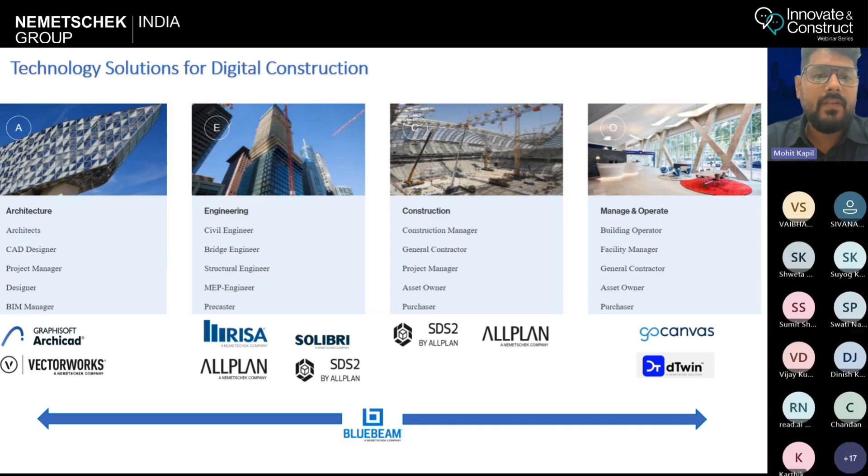So now I'll jump on to today's topic, that is SDS2. Today we are going to explore the latest release, that is SDS2 Indian region. SDS2 is a leading steel detailing software, with fabrication intelligence and automated connection design. It is a very old company: SDS2 was founded in 1981 and has been in the market for 43 years. SDS2 merged with Allplan, basically the Nemetschek group, in 2022.

So these are all the steel buildings where SDS2 can be used. Commercial, industrial, platforms, pipe racks, rails, custom homes, mixed use, oil and gas, anything. If you talk about steel, SDS2 can be used for steel detailing.

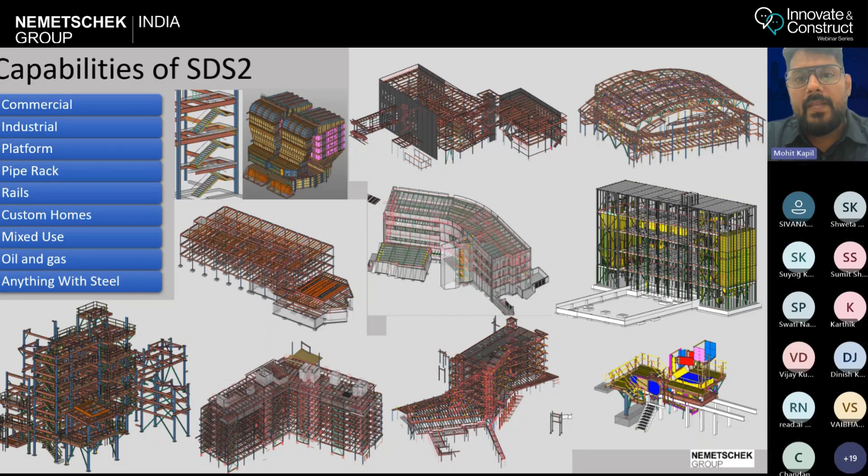Now, moving further, I just want to place a quick poll. So Shweta, can you? Yes, Mohit. So is the first poll visible on your screens? Yes. Okay, we are getting responses. So the first poll is: are you working on Indian projects, with Indian profiles? You just have to say yes or no. 82% have said no to this question, Mohit. Okay, so we can move forward.

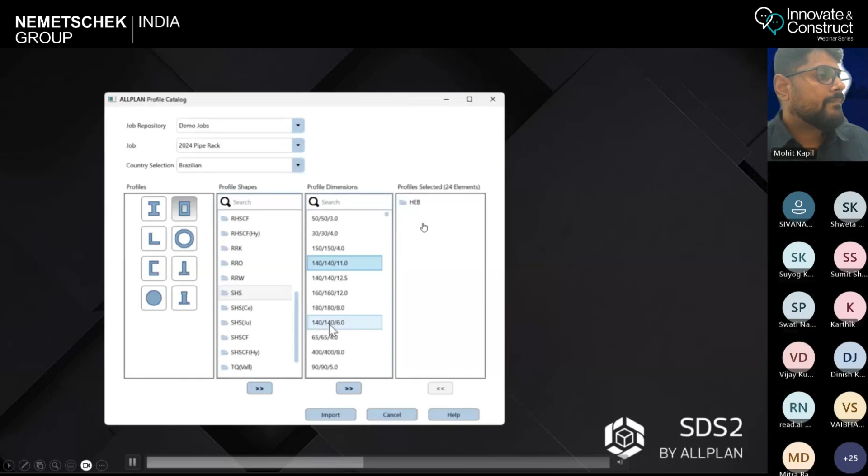So now we are selecting the individual profiles. If the profiles are already imported, they will not be copied twice. So there is no duplication.

So as you go into shapes and properties, here you can find all the imported profiles. So you can see these are Brazilian profiles which are imported into the sample model. So now it will be visible and can be used in the project.

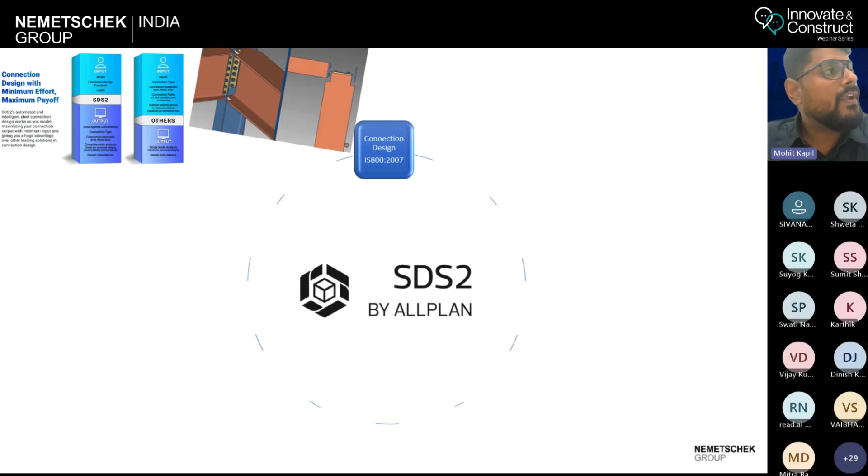So now I'll first give an introduction about SDS. What are the capabilities of SDS? So the first key feature of SDS is SDS has connection design, and for the Indian region, we have IS 800 code. Then SDS2 has fabrication intelligence. SDS has automated piece marking. We are going to cover all these topics in coming slides.

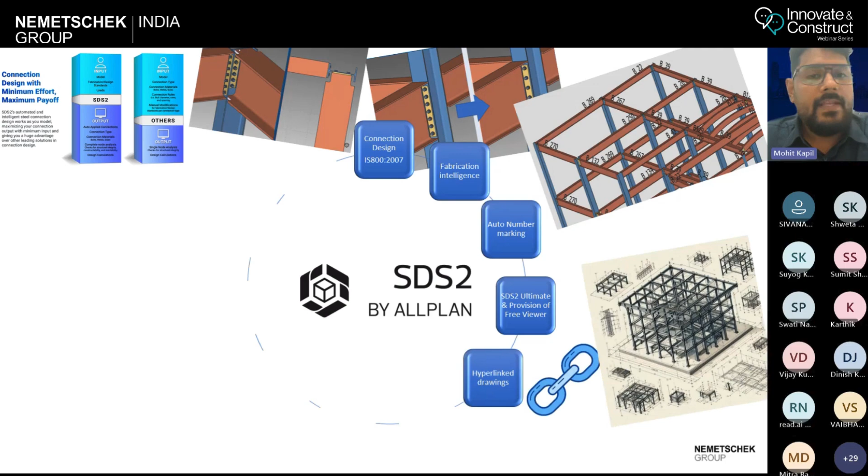Then SDS for India, we have only one unit, that is Ultimate, and we have a provision of a free viewer. Then SDS provides hyperlink drawings. SDS has better quality of export than other detailing softwares. In SDS, you have a status display feature, which is basically a filtration option.

Then integration and partnership, you can see SDS has integration with most of the market popular softwares. Then SDS has a feature of live user modeling. SDS has the option of direct plugins for doing complex geometries and adding miscellaneous steel. And SDS also has a cloud collaboration platform, which is called BIM Plus. So now we'll go one by one.

So the first feature was connection design. So whenever SDS is designing any connection, SDS considers all these parameters before designing a connection. So SDS considers the connection is supposed to be constructible. It's supposed to be erectable. The user has complete control. He can apply all the connections in one single go through auto standard connections.

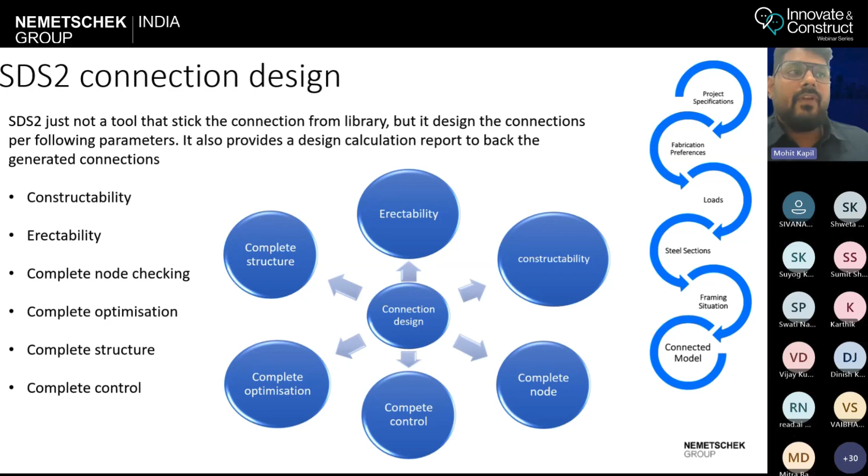And if the connection is applied through SDS, the user has full control. He can change and modify the connection if and when required. All the connections are also backed up with a calculation report. So before generating any connection, SDS considers the project specification, fabrication preferences, loads, steel sections of that region, then the framing situation, and then it generates the connection.

So these are the scenarios I just want to discuss with you. You can see this one is for SDS and the other is for the other market detailing softwares which are available. So in SDS, you can see the user input is very less. You have to give very few inputs. You give the main basic framing of the model, then you give the standard of fabrication and loads, and SDS gives you auto applied connections, connection types, bolt material, also with the design calculation.

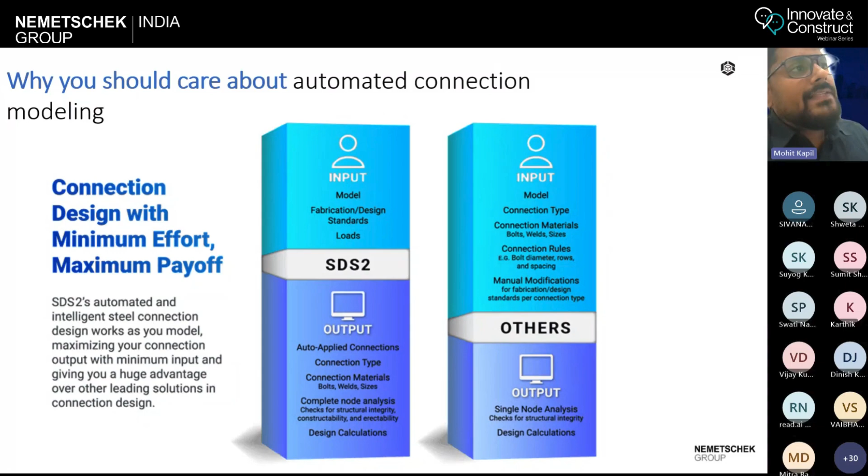So if you see, since the user input is very less, there are very few chances of having human error. And also the project timeline gets shortened. While if you use any other detailing software, you can see the time consumed is more. And since the user input is more, there are more chances of having human error.

So through this diagram, you can understand why a designing component is required in a detailing software. Nowadays, whenever a job lands with a detailer, he is also given the responsibility for doing the connection design, or he has to coordinate with the connection designer. So if you have a connection design engine in your software itself, you can easily design a connection.

You can send the calcs to your designer, and the to and fro communication between the designer and the fabricator will get squeezed out. So basically the non-profitable time, which is not giving you any income, will get shortened. And it is a very beneficial tool for a detailer.

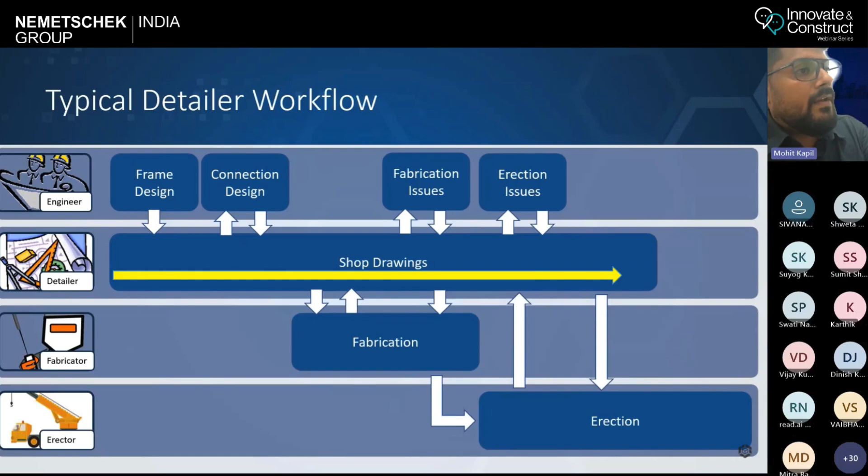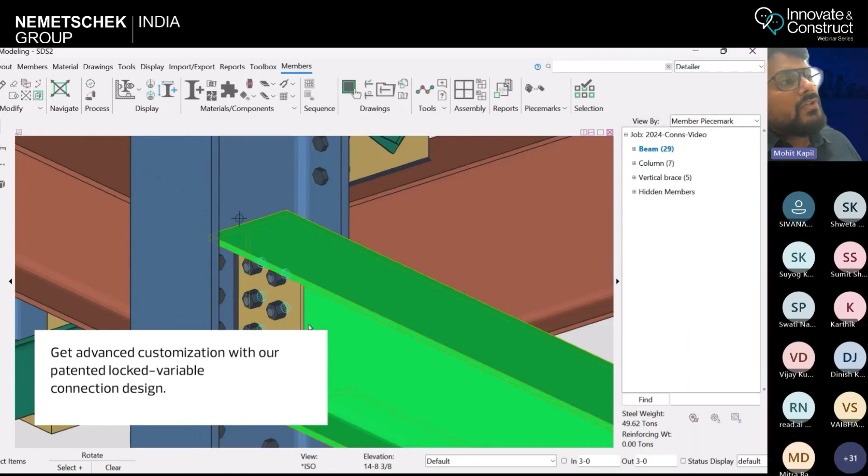You can also optimize the connection if you want. So here the clip angle connection is changed to a shear tab connection. You can also change the number of bolt rows if required. You can also change the load, and based on that the connection will automatically get changed. So in short, SDS2 does not just pick the connection from a connection library, but it actually evaluates the framing situation and generates the connection for you.

So the next feature of SDS2 is constructability and erectability. Whenever SDS2 is generating any connection, it also checks the material availability of the area, then the space validation for bolting, then any clashing during installation. It also checks any possible field and shop errors, the galvanization tank size, connection compatibility, and other various factors which can cause a field or a shop issue.

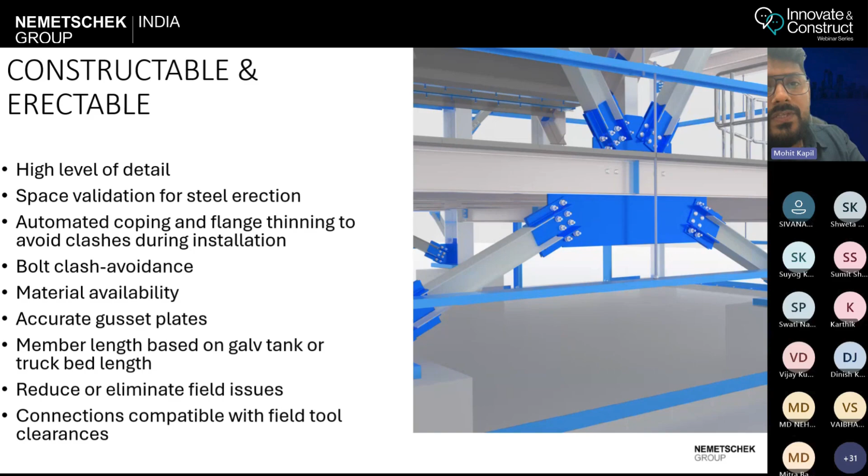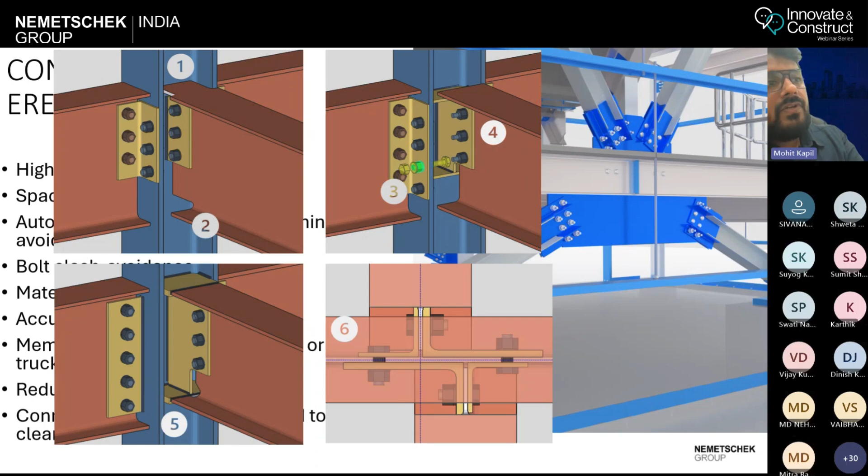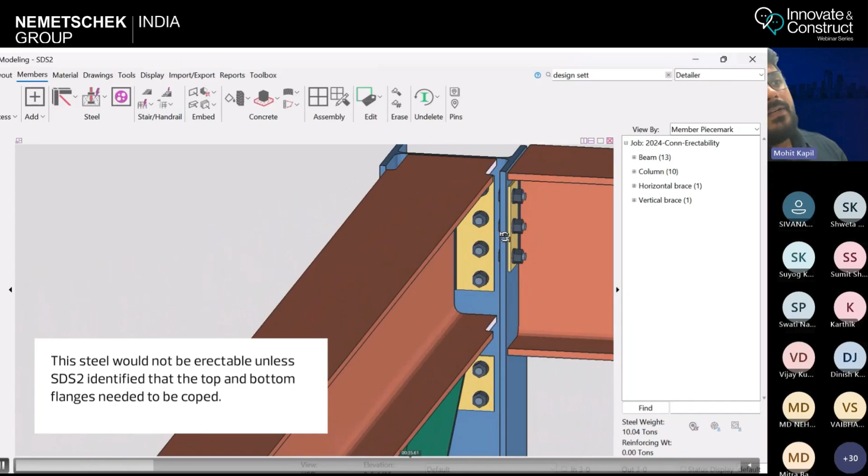So this is just a video to showcase how the constructible and erectable connection works. You can see as the connection is added, the brace is auto adjusted at the bottom of the beam flange, and cuts are provided at the top and bottom flange of the beam for bolt clearance and ease of drop-down connection.

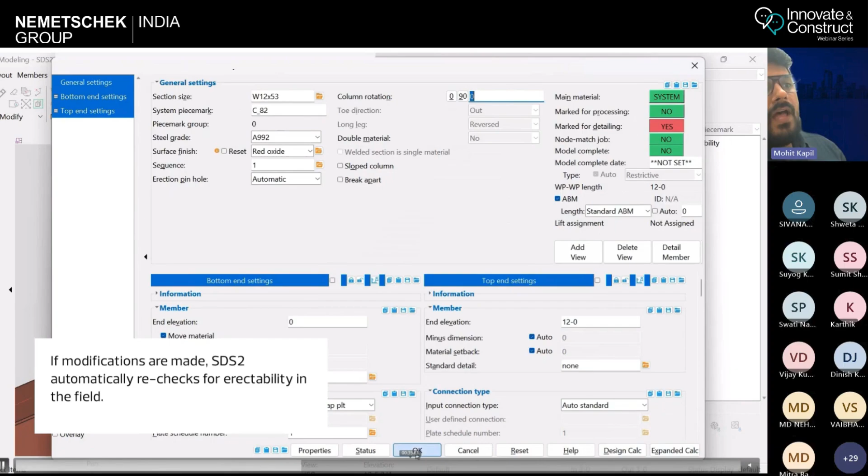Then as you rotate the column, the cuts are transferred to the adjacent beam for erection feasibility. And this is all system generated. There is no user involvement. SDS2 has fabrication intelligence in itself, which can analyze the erection feasibility at site, and also can check the constructible connection.

So here you can see the shear tabs are added. SDS2 has automatically generated and modified the connection to an extended tab since TC bolts are there, and a special gun is required for installation.

Then the next thing is complete node modeling. So what does this mean? It means if you're doing any connection or modifying any connection on one face of the column, SDS2 will automatically analyze and modify the connections which are coming on the other faces of the column.

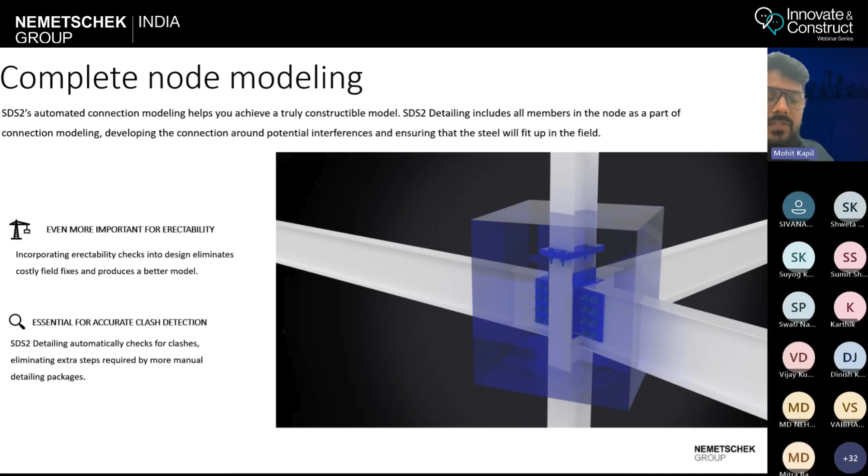For example, if you are modifying a shear tab connection to a moment connection and stiffeners are added in the column web, SDS2 will automatically analyze and modify the connections which are coming into the web. Then complete optimization is, whenever a connection is generated through SDS2, the user can modify the connection as required.

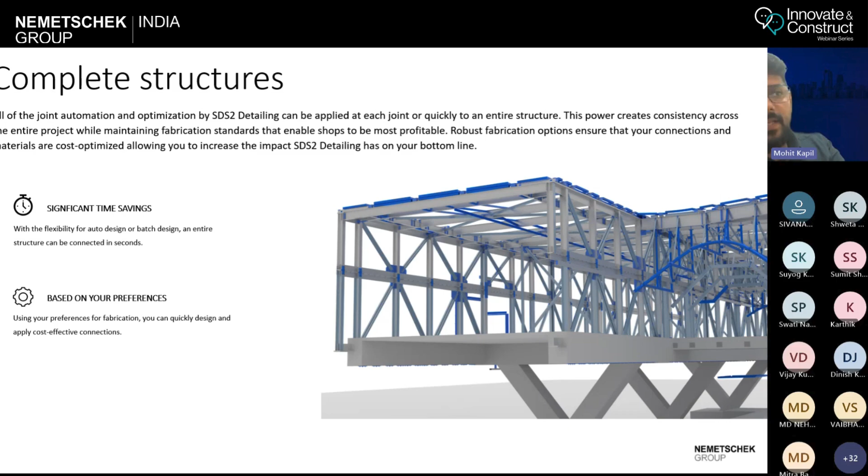Complete structure is, if you have a typical connection or you feed the auto standard connection into the system, you can apply the connection to the entire structure in one single go, and it saves a lot of time. The next best feature we have in SDS is connection cube.

Currently, if detailers have to send any connection query to a designer or an engineer, they take a PDF snap, put all the dimensions manually, and then send it to the reviewer. It takes a lot of time, and at times it is very confusing for the reviewer, who is not able to understand what exactly the question is.

So for that, SDS has a very good option called connection cube, where you can select the connection and generate a report. I have a small video explaining how the connection design report is generated. You can see this is a connection. You can directly add a connection cube option.

You have a connection cube add where you can select the connection which you want to send to the reviewer, and you can add a cube here. Once the cube is added, you can include what drawings, what reports, what bolt criteria you want to include, and you can generate a report based on all the parameters. And when you double click, the report is generated.

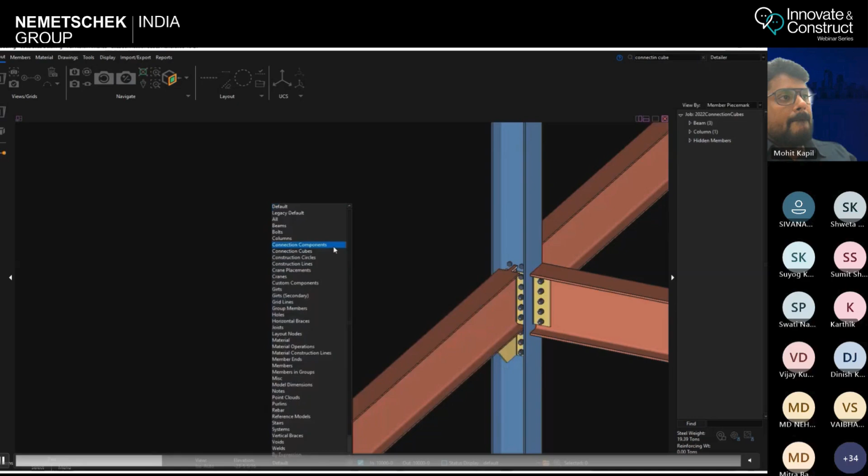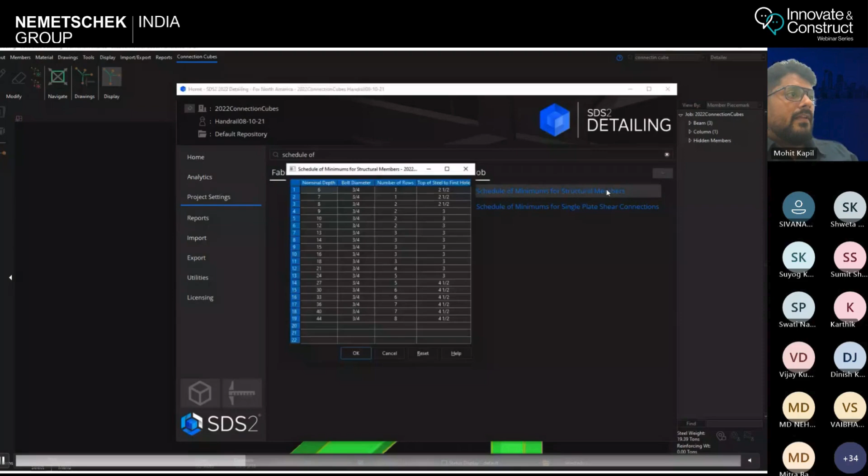This is another option which is added in the 2022 version, where you have to turn this on from the display command. You can provide a name to that report, or you can also tag it with the beam number. You can also include the schedule of members.

Sorry. So I'll just show you the report. I think there is an issue with the video.

So the next option which SDS provides is auto piece marking. So what is auto piece marking? If you take any other detailing software, at the time of modeling, the piece marking is not allocated. After modeling, you have to go to a complete version and then add the piece marking. But in SDS, as you add a member, a system generated piece mark is assigned to that particular beam or column.

If the members are identical, they get clubbed and one single piece mark is given. So if you are adding 10 identical beams, and later adding any material operation, SDS will prompt and ask whether you want the similar change in other beams. That is the best feature where you can do any material operation in one single go across multiple members. The second best feature of auto piece marking is that you can track the members.

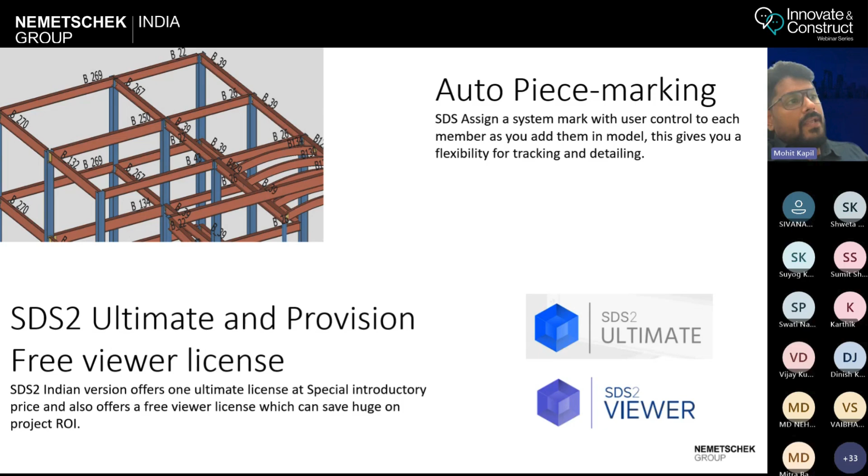SDS also provides a free viewer. If you talk about any competitor software, they do not have a drafting version and they do not have a free viewer license. But SDS gives you the ultimate version for the Indian profile, and also provides a free viewer license.

Since SDS has a connection design engine, you feed a lot of data before starting the project, or you can import it from an old project or a seed file. So when you generate the drawings, a lot of information is already there, like welds, member profile, bill of material, field bolt list. If you want to add connection reaction reports or design loads, that can also be added. Elevations and material setbacks are added. If a clip angle or any connection is there, the material information is added, along with hole dimensions, hole placements, and RD marks. Basically the drawings come out almost 60 to 70% detailed, because in SDS you have set detailing templates.

All the drawings which come out of SDS are also hyperlinked with each other. So if you are extracting all the drawings, and you have an erection plan, if you click any piece mark, it will automatically take you to that shop, gather, or part drawing. This saves your time going back and forth.

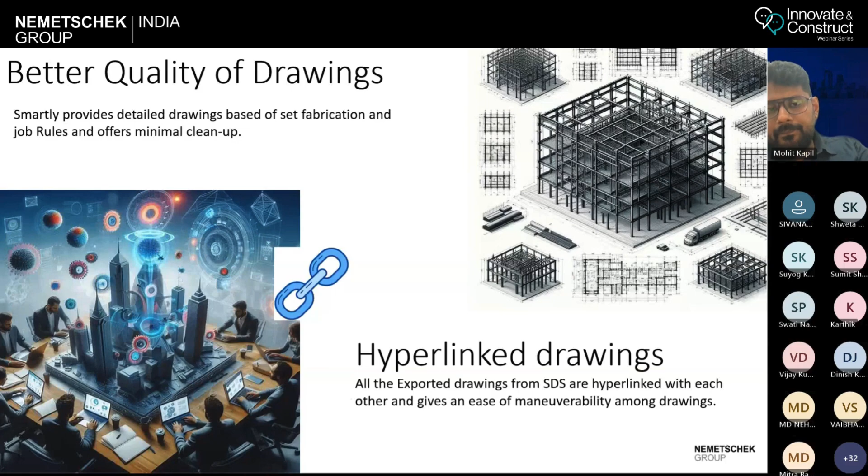SDS also has direct components for adding complex geometries like stairs, handrails, ladders, miscellaneous assemblies, four stops, girts and purlins, clevis and turnbuckles. I'll play a video to showcase how easy it is to add a stair and handrail in SDS.

You can directly import a drawing into SDS, and then through the quick stair adding command, you can directly add a stair. You just have to select the nosing point and the entire stair tower gets erected.

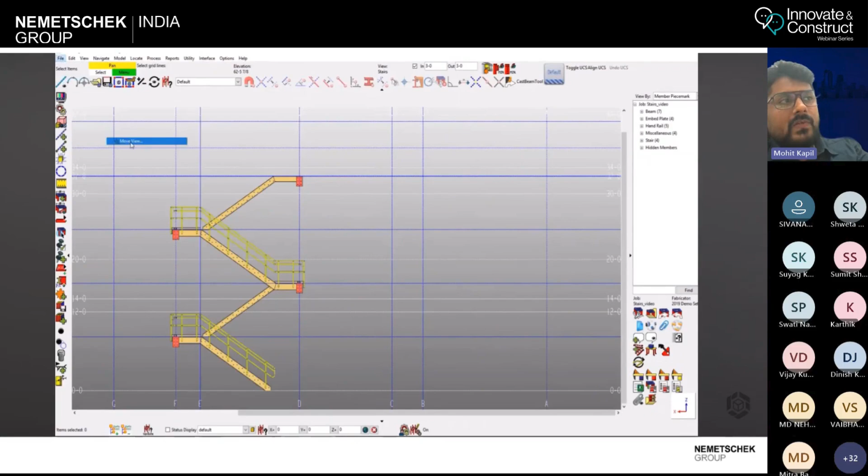For adding a handrail, there is a direct command for quick handrail. It will give you a skeleton, and then you can change the post spacing, the stair type, the tread type, the railing profile, the turn and the return, and whether the ends should be a post, a splice, or just a post end. There are a lot of features you can control.

So basically, these commands give you the feasibility to add these kinds of miscellaneous assemblies in one single go.

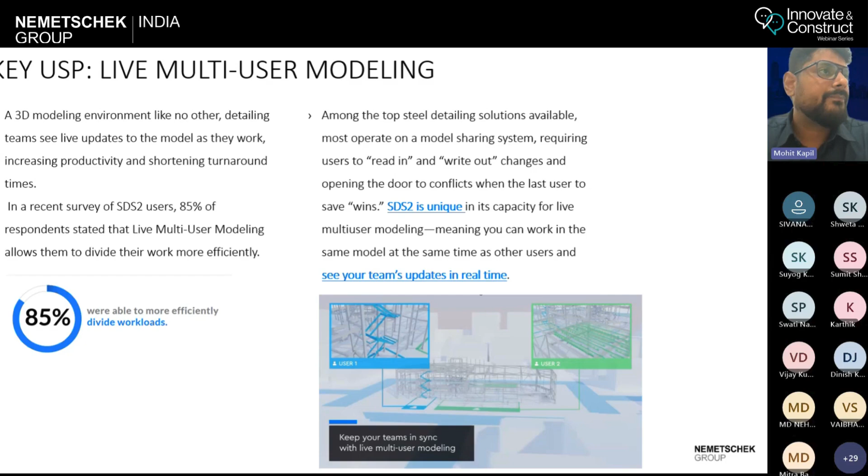Then there is a very good feature of SDS2, the status display feature, where you can filter the entire structure and model on parameters like existing steel or project status, whether it is completed, issued for approval, or issued for fabrication. You can also filter based on member profile, member type, or material, and based on connection status—whether connections are failed or not—type of bolts, type of weld, sequencing, or zone.

There are a lot of parameters based on which you can filter the entire model. This helps, for example, if you are running a big project and in the middle of it you find out that a particular profile size is not available and you have to change it. With this filtration option, you can isolate those particular steel profiles from the entire project without failing.

This is a very good feature for reviewers and checkers who want to filter the entire steel, and also for modelers. If the modeler can place a project status into the main model, the checker can easily isolate and allocate work to detailers using this feature.

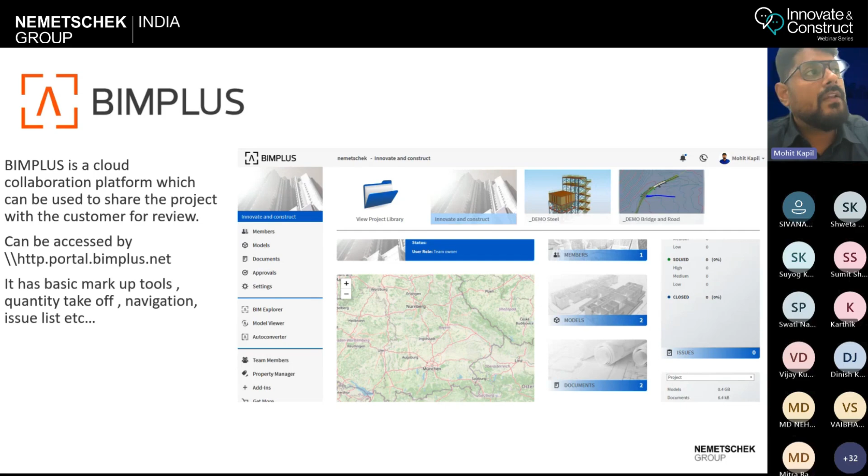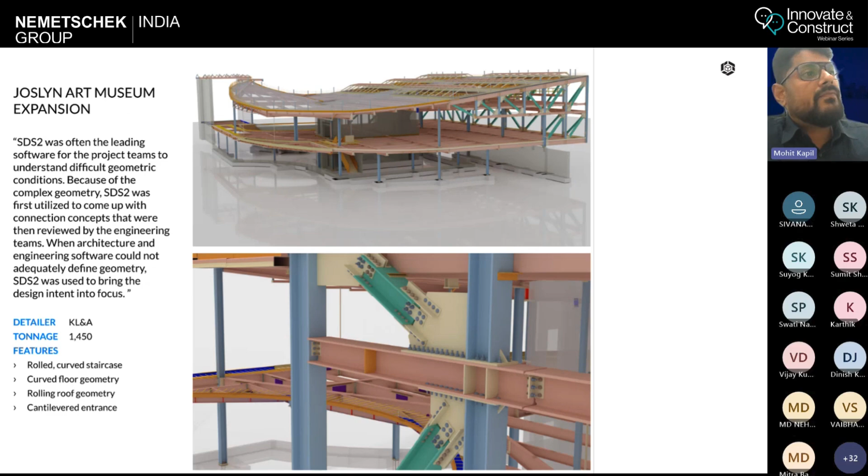Now I will showcase a few projects done in SDS2. This is the Joslyn Art Museum expansion. It is a non-linear building with very complex brace connections, which you can see in the image, and this is the final erection image of the building.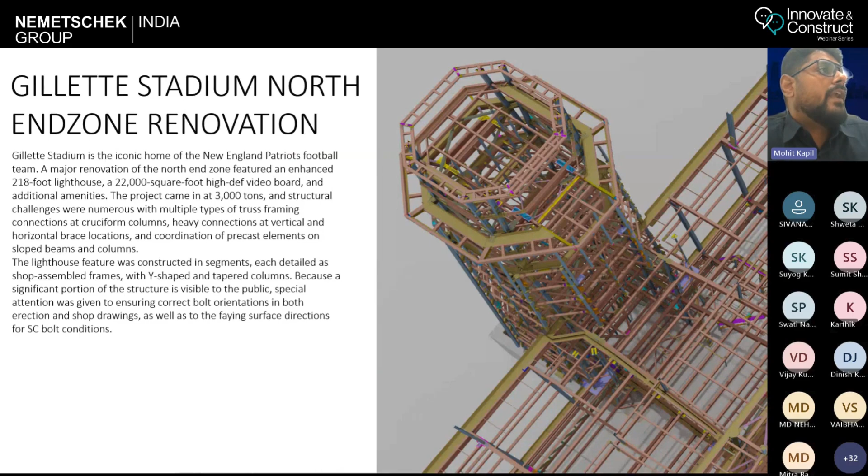Then there is the Gillette Stadium North End Zone renovation. In this building you can see the model image versus the live site images. Notice the green colored Y-shaped columns, which were very critical to execute, done in SDS2.

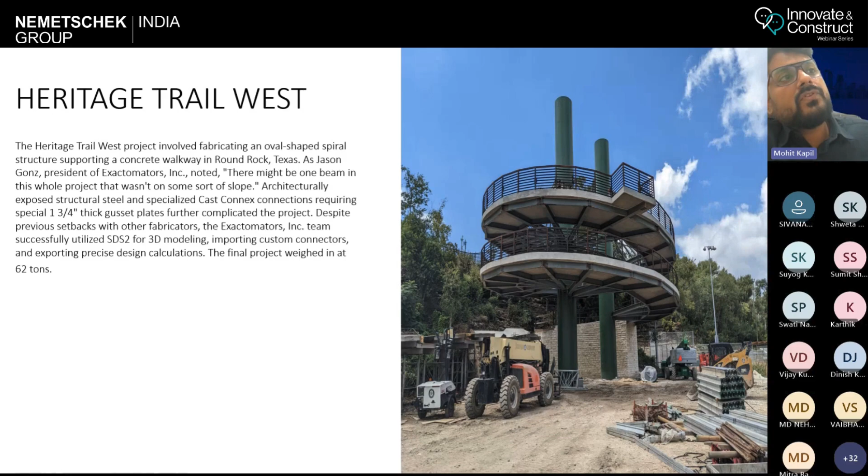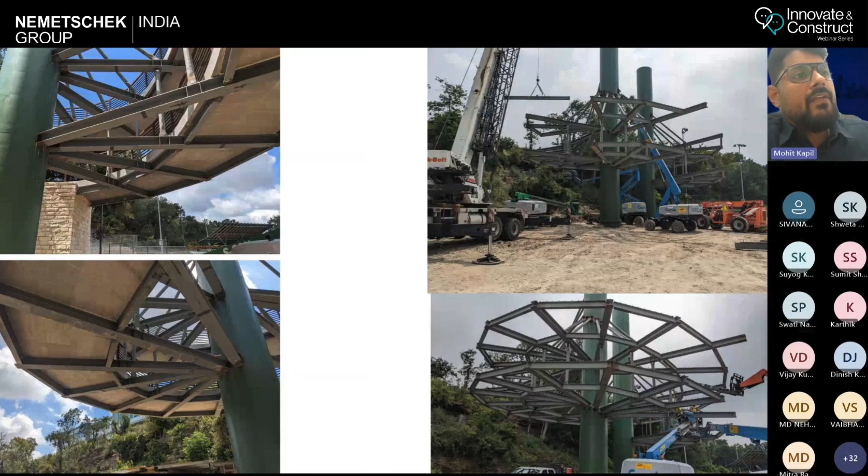Then there is another project called Heritage Trail West. In this project you can see two pillars - the entire circular platform was connected and hung from these two pillars using rod braces. These are the drawings, these are the model images of the project, and these are the live on-site images.

This is the last building I want to show you, the Deloitte Summit Tower, Canada. There is a main concrete tower from which a box-type structure was connected, and these complex connections were executed in SDS2.

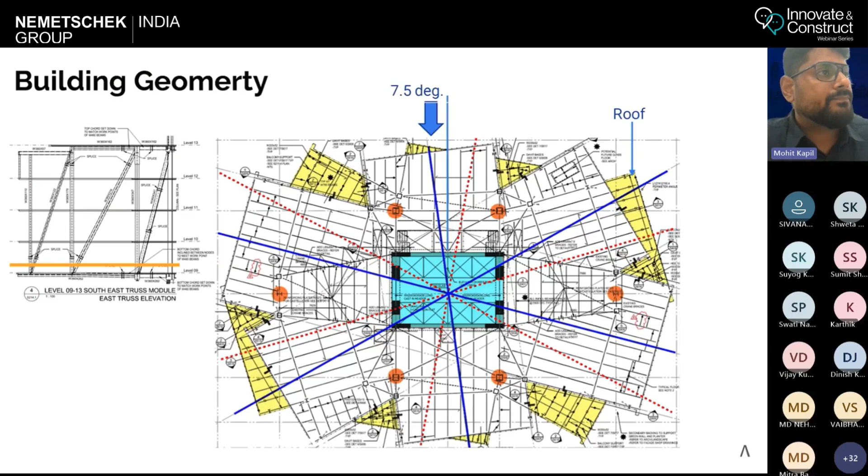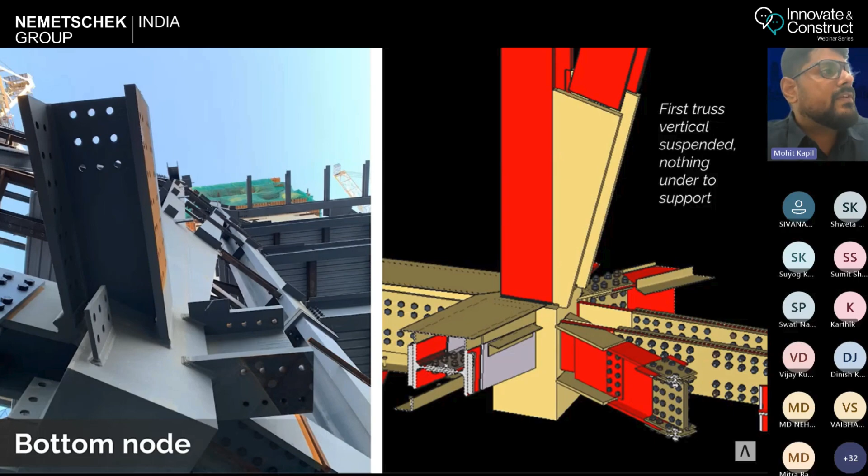This is the drawing plan view and this is the model image of this project. This is the modeled connection versus the on-site connection, and these are the images we have in the drawings for the connections.

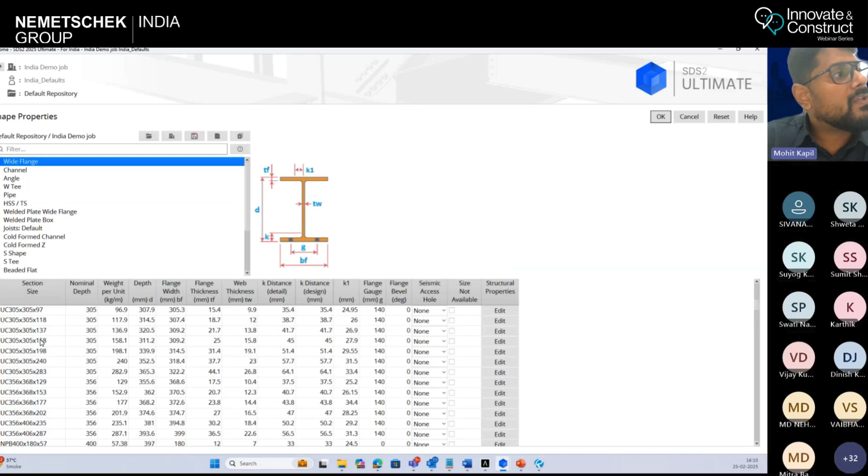The profiles which are imported, you can see in your shapes and properties. So all the Indian profiles are here - all channel profiles, ISMC, ISMJ, all angles ISA are there. For pipe also, you have ISCHS profiles available in the version. Also you have British profile sizes available, which are being used by Tata and Jindal Steel.

So I'll just open the SDS2 model. I have prepared a small model using ISMB and Indian profile sizes. I'll quickly go through and explain - this is the lightning mode.

This is the layout option where you have your different views which you want to open. Then you have your save area and save image, which is for your erection drawing. This is for adding any grid lines, any curved grid lines. This is for plan view. This is for taking any section view. This is for undo, and this is for depth check and navigation.

This is for snap to surface. This is for construction of a construction line. This is for erasing any construction line. This is for circular construction line.

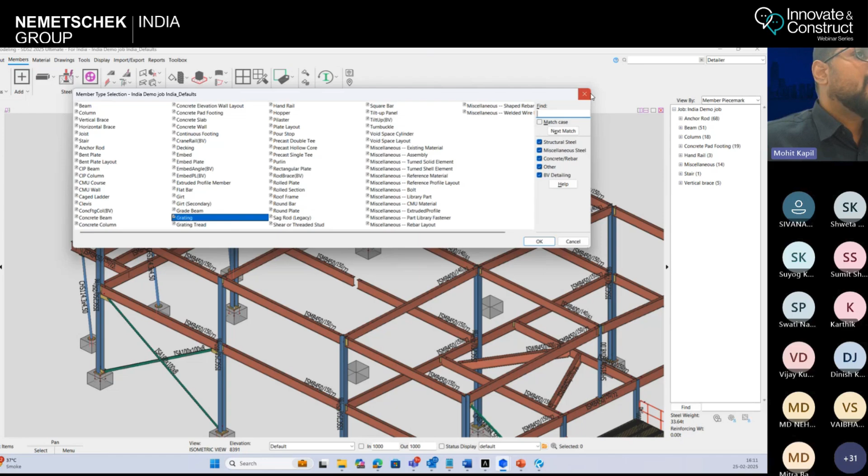Then you have the second option as member. If you go to member, you have all the options for adding any members, like what you have in your older classic mode. So currently I'm in lightning mode, and you have all the main members you can add from this profile. There are also a few quick tools for adding column, beam, vertical braces, horizontal braces, or joist.

You also have a plugin for adding anchor bolt, stair, cage ladder, railings, pour stops, girts, hoppers, and purlins. You also have the option for adding a quick stair and quick railing, adding embeds, adding any concrete members like footing and concrete slab. You can also add any wall systems, any rebar systems using this, and this is for the undelete option.

Then you have the material option where you can add any material - plates, flat bars, clevis turnbuckle, floor plates like grating and checkered plates and deck. Then you can add any component like cap plates and base plate shear keys. You can also add rebar systems, any safety lines, holes, any stiffener column reinforcement, pour stops, bolt holes, then studs and welds using these commands.

Then this is a drawing command. Since this is a complete version, you can directly sheet load and detail a drawing from here. So this is a drafting option where you have the erection placement option, then connection cubes, for detailing any member, for detailing any material, and sheet is for sheet loading, the auto sheet loading command.

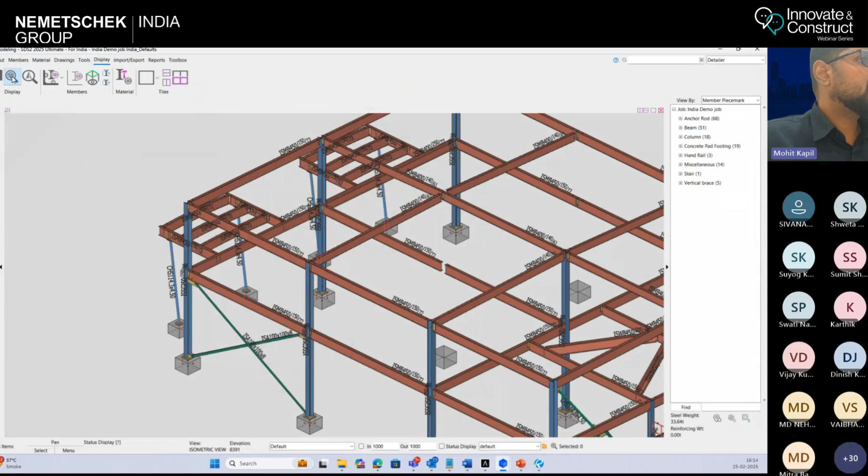I'll just show you the filtration option. For example, I'll put a beam as galvanized, and then put a filtration option here. Instead of this, I'll put a member status and I want the member to be galvanized. I can put a color if I want - I'll put a green color and press OK. So you can see all these three beams are galvanized out of my entire structure.

So this command is very useful if you want to isolate or filter any particular steel.

You can turn this command on directly using this option with one single click. You have an option for splitting the screen. So you also have the option here. If you want, you can split the screen and use both screens simultaneously. Okay.

Then you have your import options. So in SDS, you can directly import or export any model from this command. You can also find this command on your main screen. So you have the import, export, and report command, which is the same as what you have here: import, export, and report command.

And you also have your toolbox command, where in SDS, if you go to the main site, SDS2, you can go to support, go to SDS toolbox, and you can see a lot of toolbox options there which you can download. So the plan profile catalog is there. Similarly, you have BIM plus upload also.

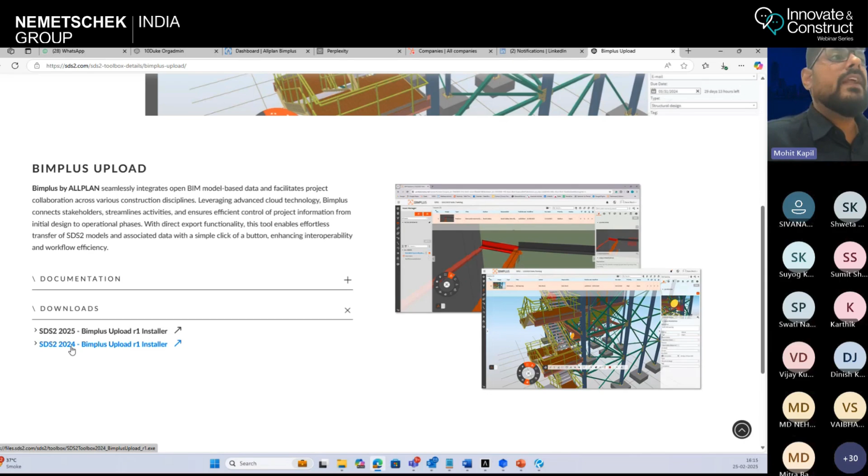So you just have to go to more options and then download the version you are working in. For this, the plugin is available for 2024 and 2025. So you can download this, and once you install it, it will get directly attached to your main SDS2 model in the toolbox command option. So I have imported almost all the commands.

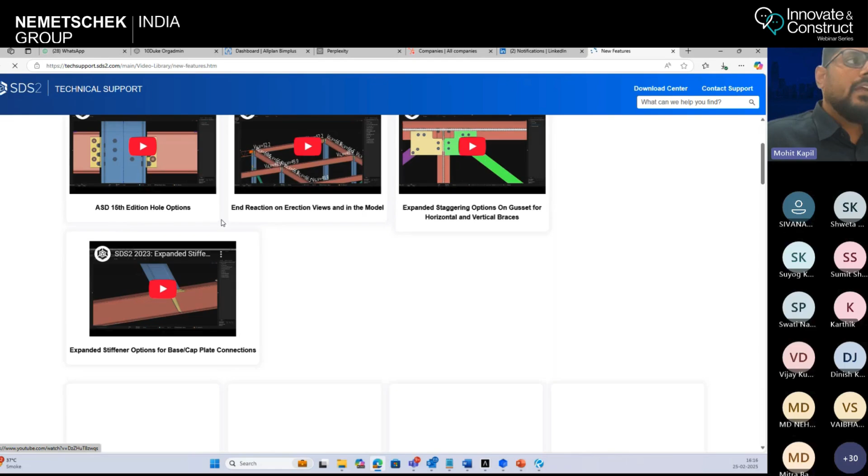Then one more thing I just want to show you. If you go to the home page, you have commands here, which is your learning command where you can learn the new features. There are small videos if you want to see. If you go to the new features, you have 2025, 2023 small one-minute videos which you can go through to learn what has been updated in the new versions.

So these are all the new commands from 2022. These are all the new commands from 2021 which were added. Similarly, you have them for older versions also. Then you have getting started videos. So if somebody is new and wants to learn SDS, he can review these videos. These are basic videos: how to draw a construction line, how to create a project. So all the basic things.

Then you have online training also. These are small trainings and you get a certification in the end. You have a support option, which is for contacting us. And this is a technical support option, which is an online help tool. So if you go here, you have your frequently asked questions.

Sorry, I think there is some issue with the site. I think currently the page is not visible. I'm sorry. So I think we can directly go on to the...

So from here also you can go to the technical support center. This is the basic site where you can go to getting started videos. You have online help, you have FAQs also. So FAQs, if you have any doubt regarding licensing, modeling, drafting, import, export, networking, how to install a new license, MRP exports, general template settings. So you have everything mentioned here.

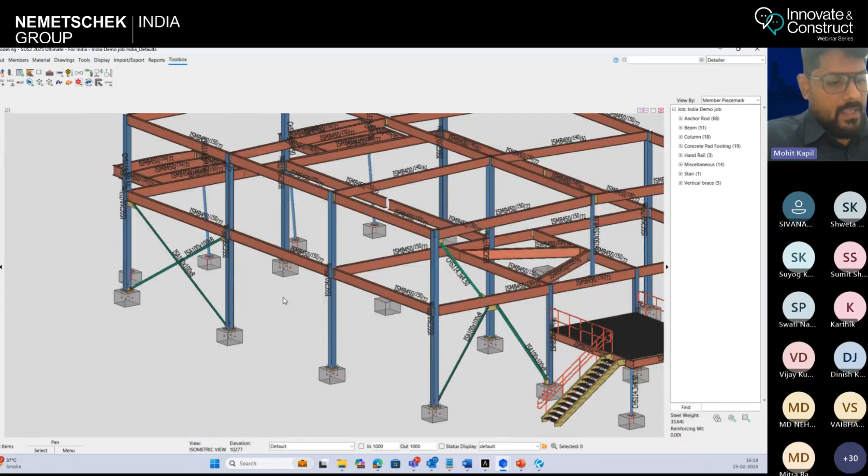So I'll open the SDS2 model. This is a small model that has already been created. So I'll just add a few members and show you how the SDS2 Indian version works. So we'll go to the navigation command, and we are on 0 elevation. Now we'll add a column. For adding a column, we have a direct tool, that is the add column tool.

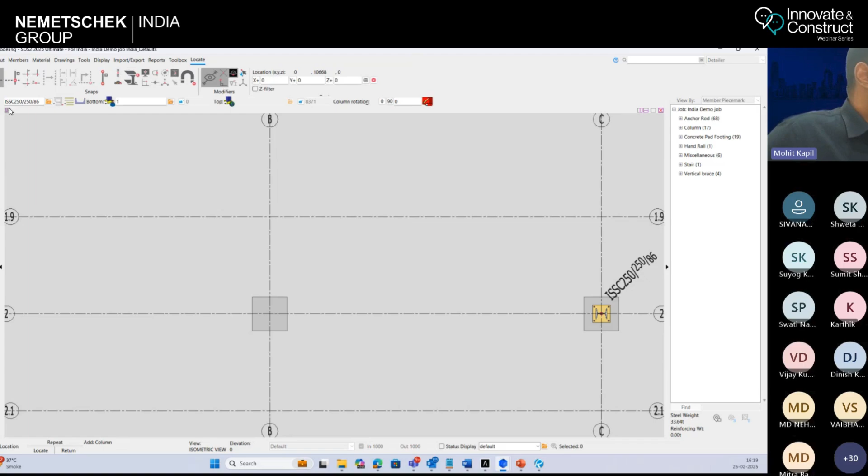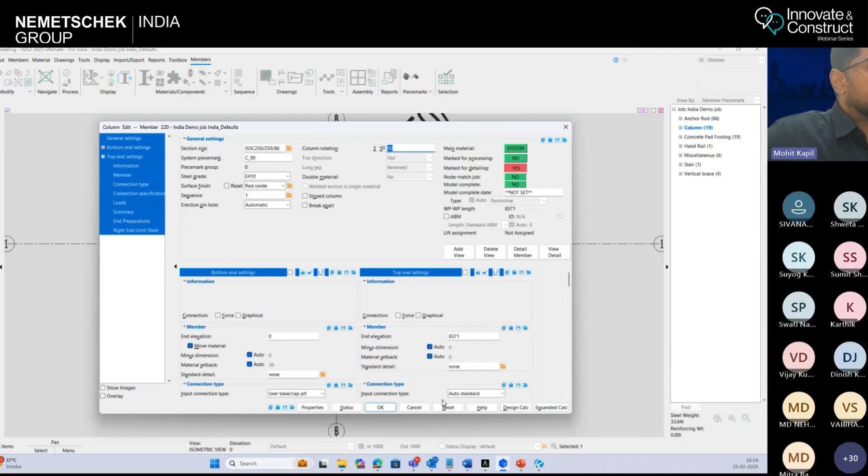So now if I have to add a column, the profile size is ISSC 250 by 250 by 86. So I'll directly add this. I choose a repeat command where I can directly add the second column. Sorry, I'll just process the members. This column is rotated by 90 degrees and the top elevation is correct. So now if I rotate the model, you can see all the connections are automatically generated for this.

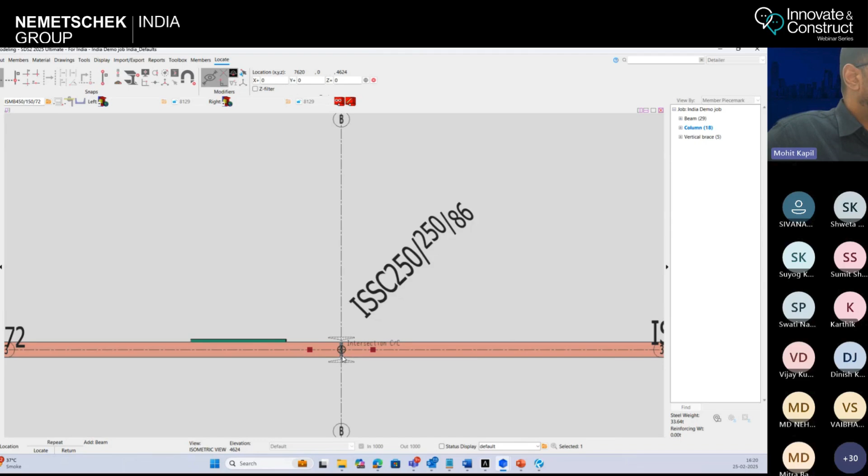Now we'll add a beam. So we'll go to another elevation, that is 4624 mm. So we are here. Now we'll add the beams. We have a direct command for adding a beam. We can go to beam. The beam profile is ISMB 450 by 150 by 72. So we quickly just, here to here, we'll add a beam. From here to here, we'll add a beam. So you can see the beams are added.

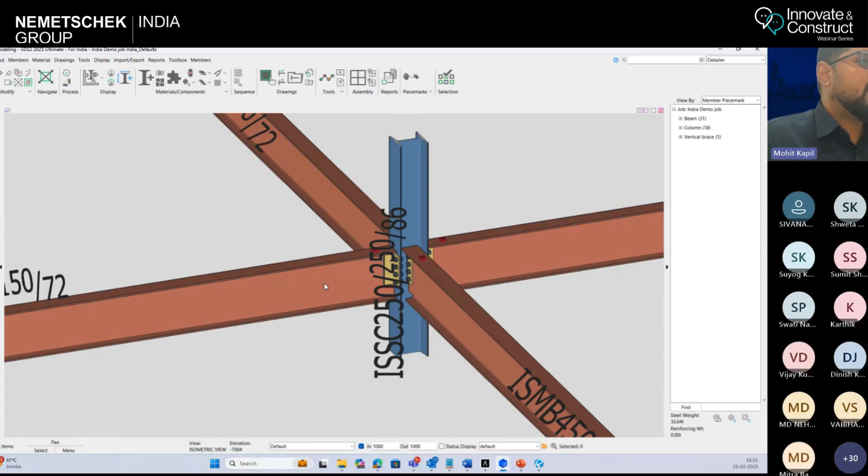Now, the best thing about SDS2 is if you want to change. Currently I have a clip angle connection at this side and I have a shear tab connection at this end. So when I double click, you can easily see. This is an auto standard connection. This is a web plate connection. And you can see the load for both the members are different.

So if I change, I can modify any connection. I can go and I can choose this also as an auto standard. You can see the loads are automatically changed. When I press OK, the connection is modified.

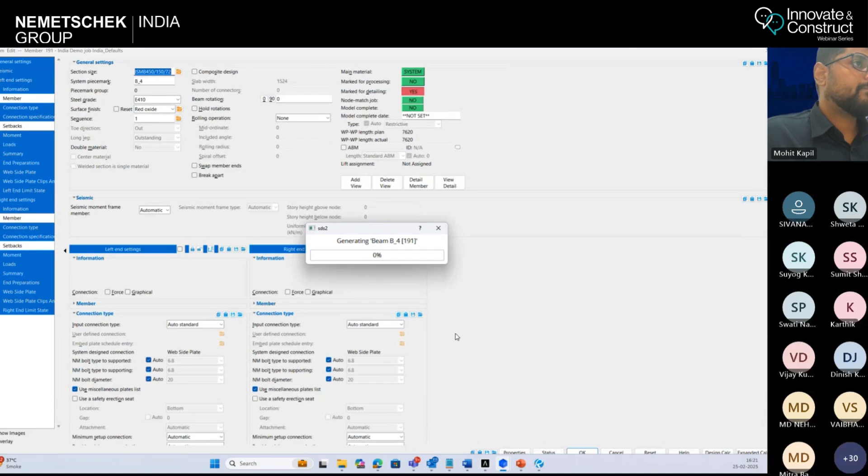I also want to show you one more thing. If you go onto the project settings and if you go to design settings, you have IS 800 codes. So whenever I generate a beam, if I double click this beam, I extract a report. So you can see this report is generated in IS 800 code.

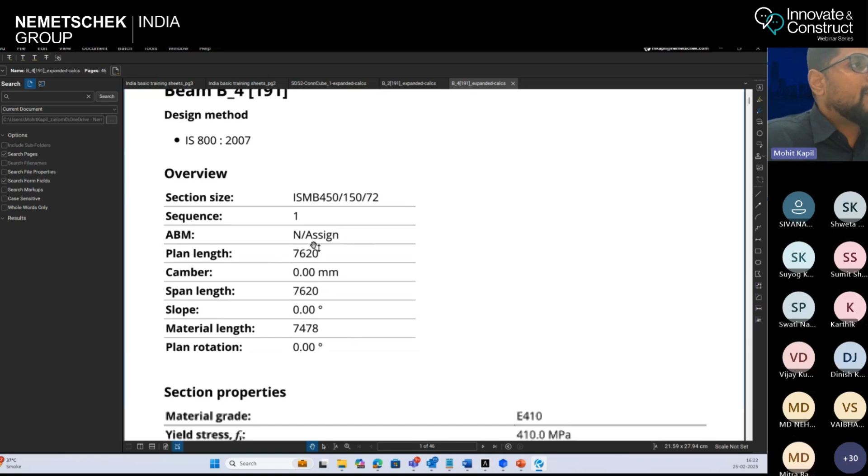You can see all the parameters like the section size, sequence, ABM, plan length, camber, and all the member related information like material grade, yield strength, tensile strength. All the parameters are being calculated. Also, there is one more thing I want to show you. If you go down in this calculation, you can see here.

All the parameters, for example, bolt bearing on beam web, it has considered a number 20 and it has also marked the IS code from where it has considered the reference table. So it has taken this number from IS 10.3.4 clause. So you can send this entire report to your designer and he can review this.

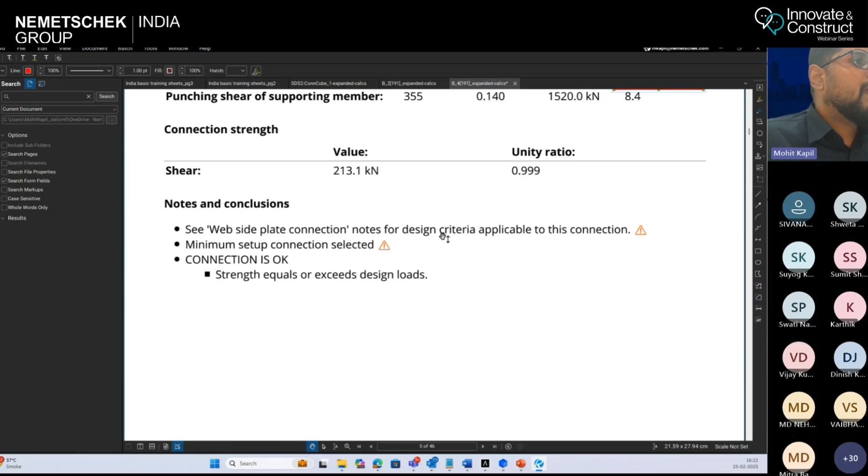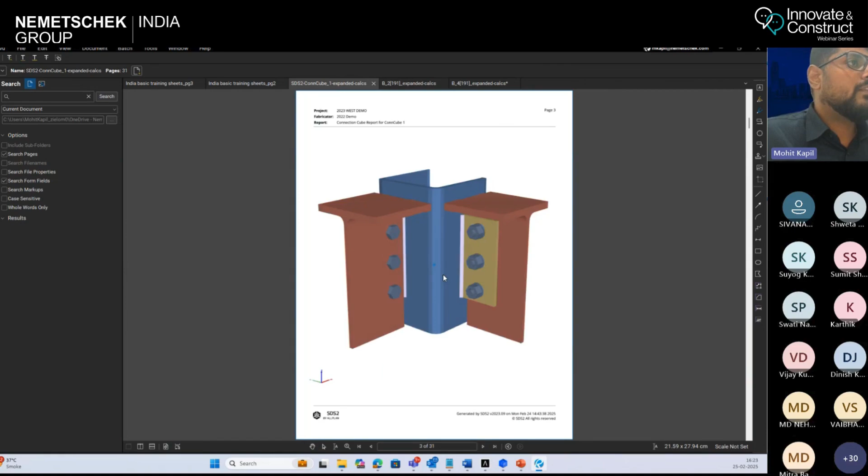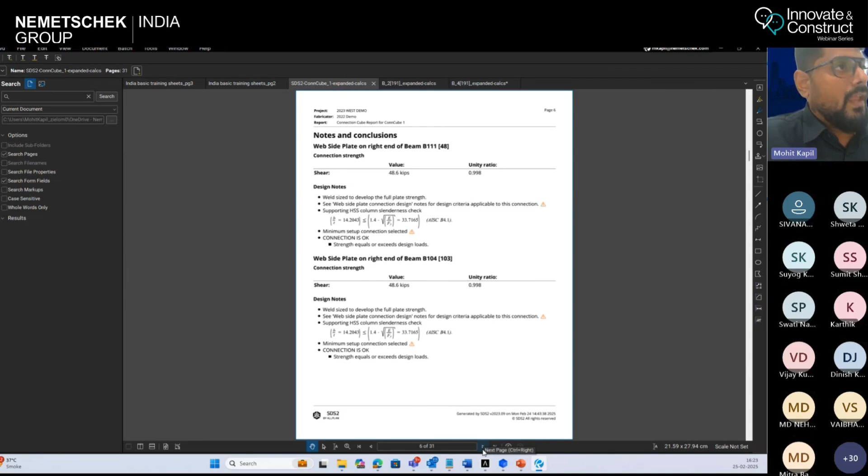So what is the bolt length? What is the material thickness? How SDS2 has calculated. SDS2 will give you the entire calculation attached with your connection cube report, and this you can directly submit to your designer for review if you face any issue with any particular connection.

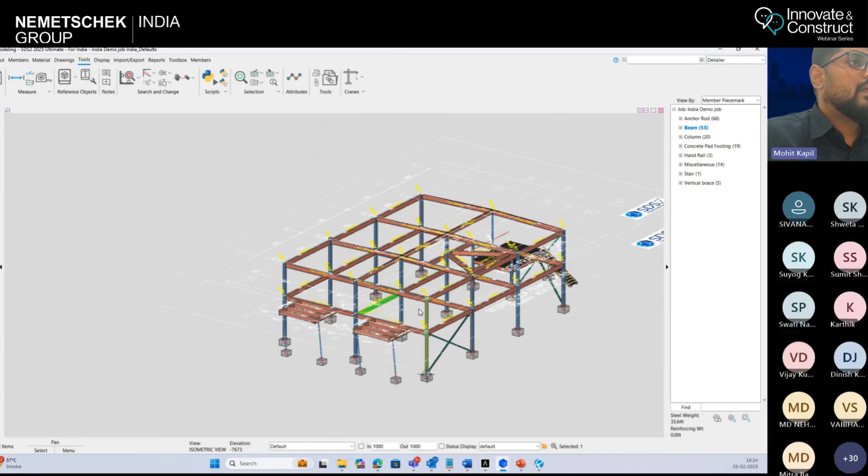Also, there is one more thing I just want to show you. In SDS2, you can directly import any drawing. If I go here, I can import a drawing into the model, which can help me in directly placing the members. If I go here and snap the surface, you can see I can directly add the members using this layout. So all the members are added and all the connections are generated.

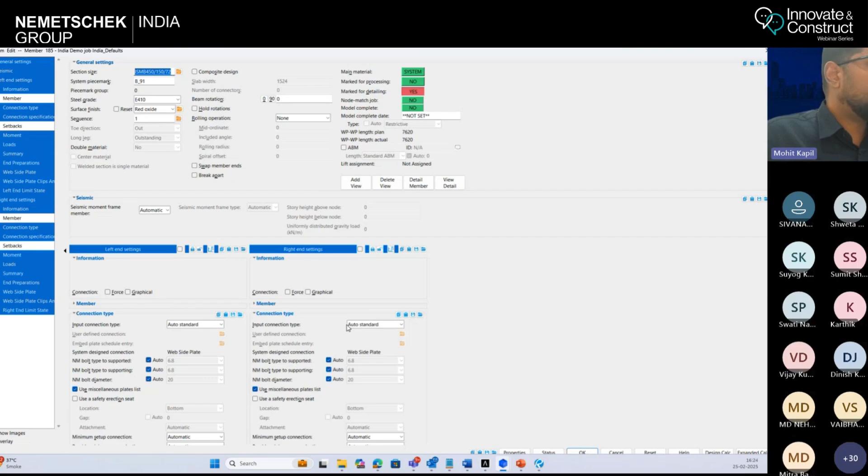There is one more thing. I try to change the load of any particular connection. Sorry, I just have to see. This is the left hand side connection. So if I go here and try to change the load, you can see this connection at this time. So if I change the load to 300, if I press OK, you can see the connection is then modified.

So these connections are not just copy pasted from a library, but SDS2 analyzes and generates these connections.

First, the stair piece mark is not showing while member edit. Is it possible to make it happen? Okay. Yes, it is possible. The stair piece mark was already shown. I'll again share my screen. Sure. So if you can see my screen, I'll just turn off the gratings for better visibility. So if you double click this, you can see the stair piece mark is there, M_84, and you can change it. Okay, I'll also show one more thing.

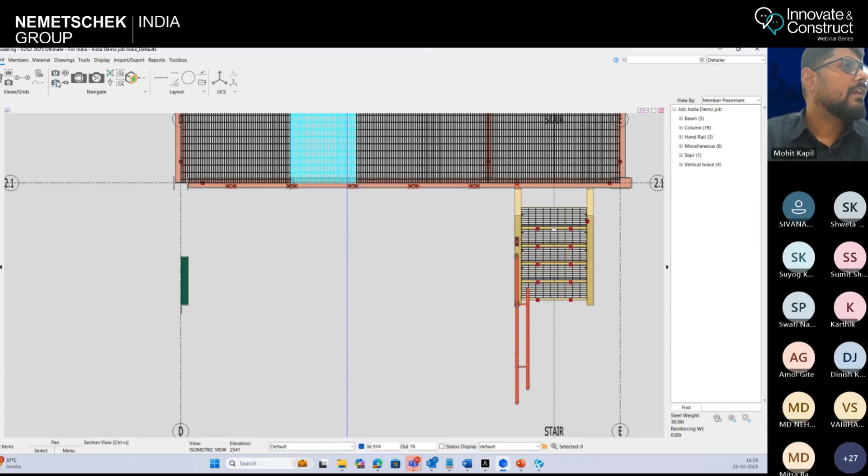So if you want to add a stair or a railing, it is very easy. So I'll just show you that also. So if we are here, we'll just take a section. I'll take a section mark from here to here. So now I have already drawn the construction lines for this. So with the member edition, you have a quick stair edition tool where you just have to put the nosing line. So in this window, all the information is there. If you want to feed any other information, you can do that. I'll just press OK. And the member is processing. So the stair is added.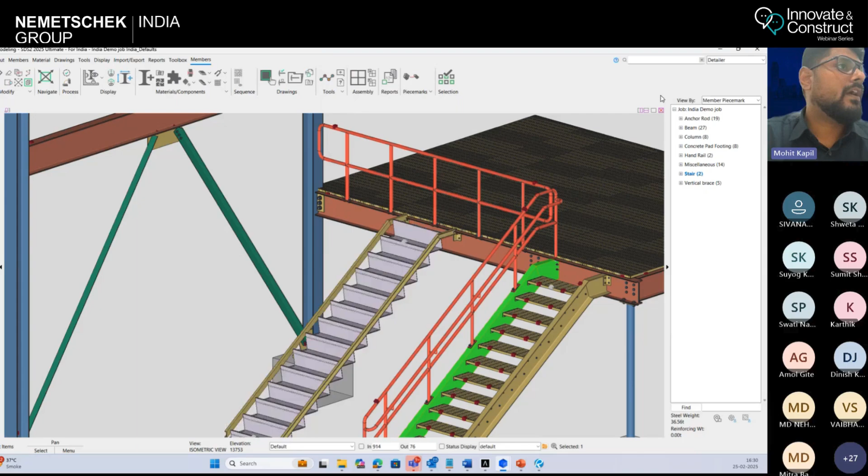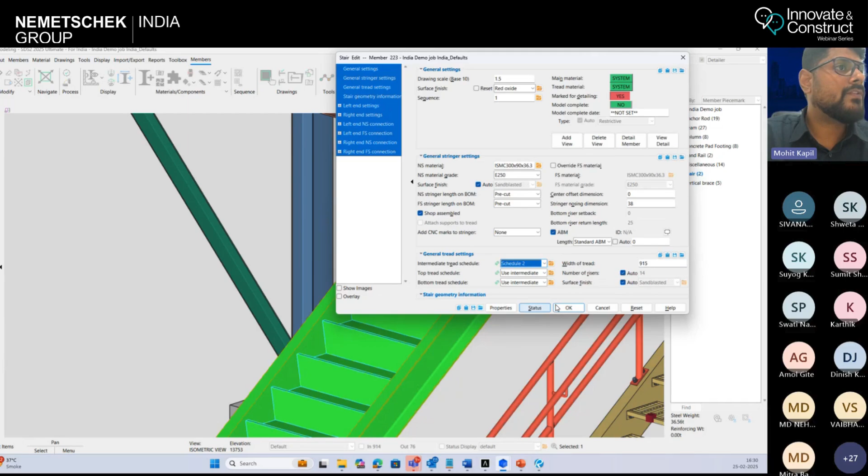So currently this is the structure which I have. Now what I can do is, sorry, I can copy the member profile and I can edit this. Okay, so you can see the member profile is generated. I can change the tread setting. So if I want to change the tread, in tread setting, instead of schedule one, I can choose another schedule. So it came as a grating tread.

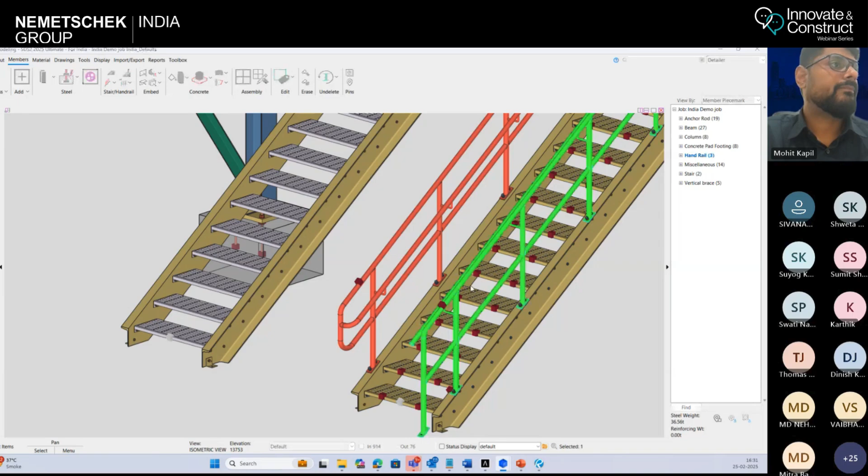Now, if I want to add any side rail, for that also you have a quick command for adding handrail to stringer. So I just have to select this, sorry, add a stringer to this. So this is added. Then I have my skeleton. So if I want to change anything, I can do, or I can just press OK. So the member is processing. Later I can modify it as required. So I can double click. It is opening. Yeah. So this window is there where I can modify.

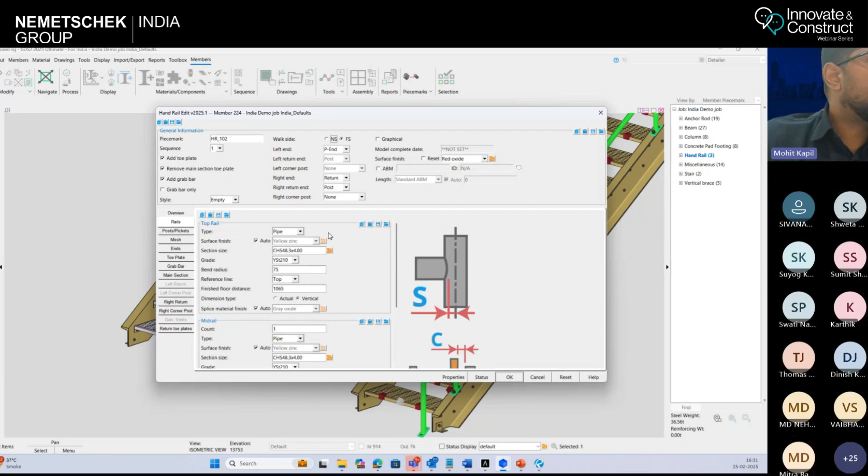I have my review option. I can change the post to a P end. Then I have all my commands where I can choose if I want to fill it with a mesh or picket, whether I want a grab bar or not. What railing profile I want, then what is my mesh detail, end details. So here I have my mid rail, toe plates and grab bar. Also, instead of plain end, I can return to post at both sides. Then I have my toe plates, grab bar details.

You can have H and V values, which you can modify here. Then you have your main section also where you have your connection with the bottom. Then you have closure plate if you want, or intermediate post details. Spacing you can define. Then you have your right return, your corner post and your return. So if I press OK, it can be modified. It is processing and it is modified. You can see I have modified this as a P end and this is returned. So this is how easy it is to add any miscellaneous assembly or any railing in a steel structure.

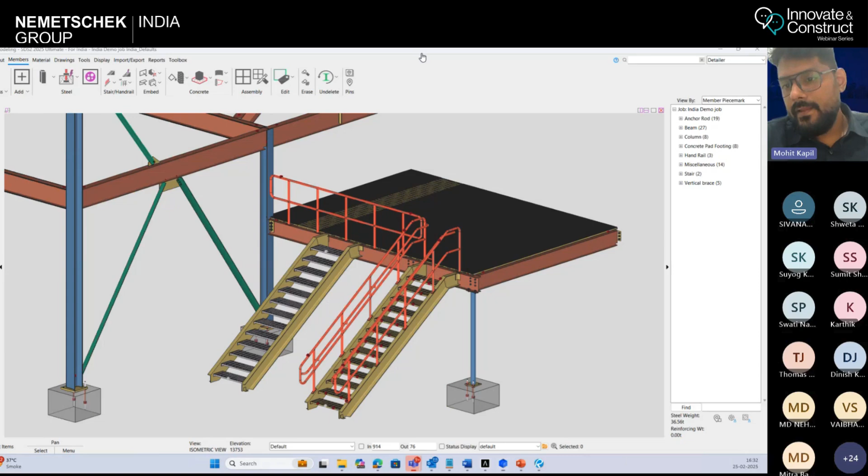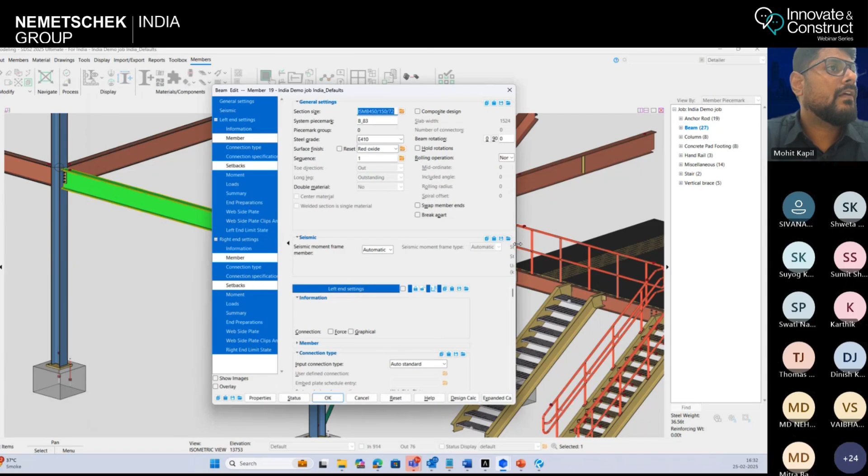Any other question? Do you have spiral beams, curved members? Yes, we have. I'll just show you one thing. So if you see here, I can modify any beam. If I double click, you can see here, I have an option for rolling operation. If I do a rolling operation, I have to define my camber in this. And I can also include a spiral offset in my beam. I can also give the rolling radius. So through this box, you can do the spiral and the curved members.

Vaibhav asked, shall we proceed with SDS2 software modeling for circular platform and equipment platform? Yes, you can do that. For circular platform, you can add a curved beam, you can add railings also. There is no problem. Currently, we do not have a direct component for spiral stair. But yes, you can add a spiral stair using this command. And you can do a circular platform. We have done a lot of projects in which circular platforms are there.

Is parametric modeling possible in SDS2 Indian version? Swati, I'll tell you, from 2023 itself, parametric modeling is discontinued. So you do not have parametric. Instead, SDS has moved from a Python based platform to an API platform where we have C#. In fact, from the next release 2026, the classic mode will get discontinued. We only have a lightning mode.

This is for all versions, Indian and US, both. This is for all versions. So we do not have parametric modeling in SDS2 from 2023 itself.

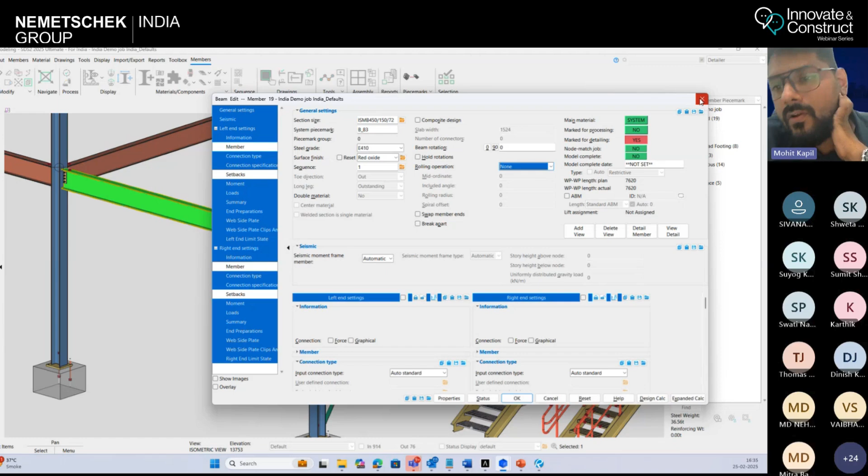So that's why they have added a lot of components which are API based, and also in Toolbox you will find a lot of commands where you can add leveling plates and small components, and they're also upgrading their Toolbox commands. Any other questions?

Mohit, there are two more questions in the Q&A section. They're asking if adding concrete steps or stairs is possible. Where is it? Q&A section. Okay, just give me a moment, I'm opening. So, adding concrete steps and stairs, is it possible?

Actually, you have an option for adding a concrete slab, and you can also perform cutting operations into a concrete step. So you can make a stair, but you have to perform a lot of operations. You can add a complete concrete slab and then give cutting operations to make it look like a stair. And from where can we get the Indian sections? I already showed you, I'll show you again. Just give me a moment.

Yeah. So what you have to do is go to SDS2. Okay. Is my screen visible, Shweta? Yes, Mohit, it is. Okay.

So you can go to support. First I'll show you where to download the Indian version. Go to the download center. Whenever you're downloading SDS2, you have an option for the Indian version, and you can download the Indian software from here. The second question is how to get the SDS2 Indian sections. You have to go to Toolbox. In Toolbox, you have the Allplan Profile Catalog. You just download this software.

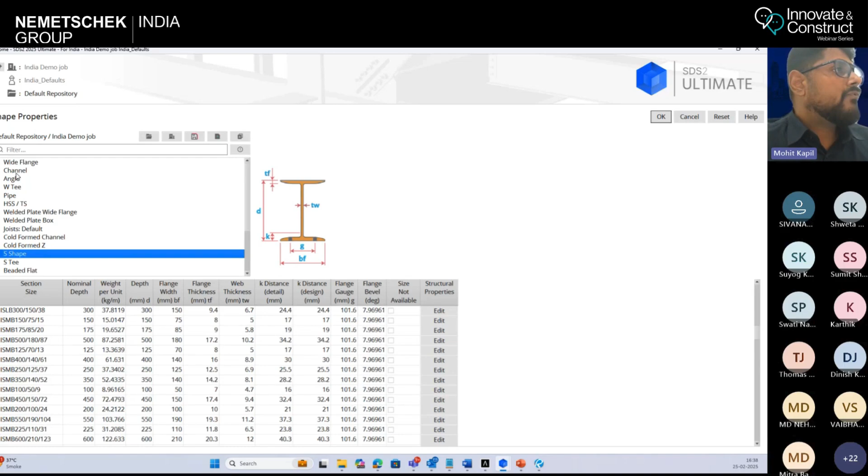I'll try this for you. It is already there. Once it is imported, when you open your main license and go to Utilities, Shape Properties, you can see all the profiles are imported: ISJB, ISHB, ISMB, ISLB sizes. Then your channels, ISMC, ISJC, ISLC. Then your angle, ISA. You also have IS EA and UA. EA is equal length and UA is unequal length.

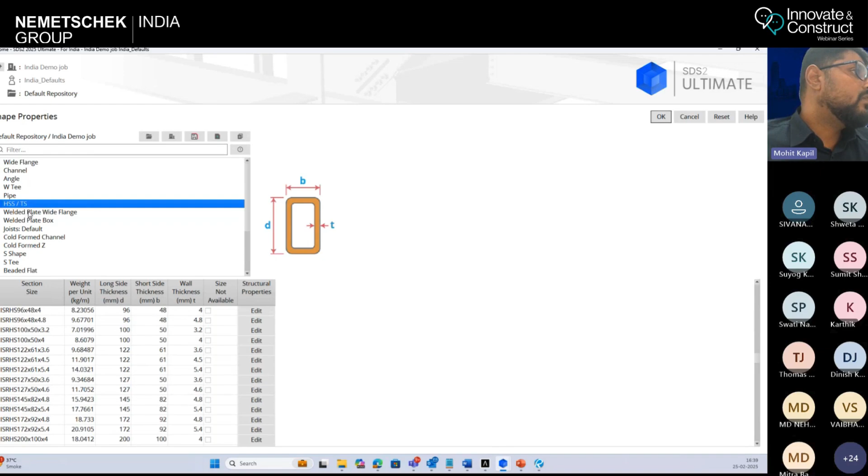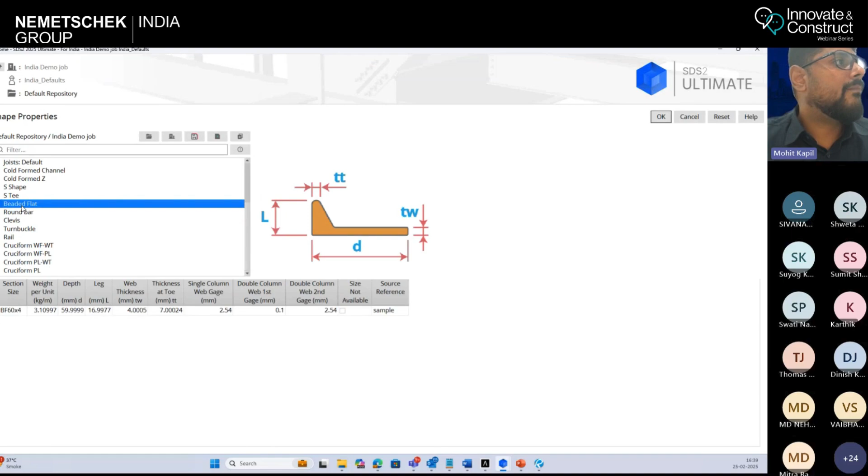You can also add a cold-formed Z shape. You can also add cruciform WF-WT, cruciform WF plate, plate and WT, and cruciform plate sections for your project. We also have options for rails and turnbuckles. You can add clevis, round bars, beaded flats, and ST. S shapes we also have. So I hope, Chandan, I answered your question.